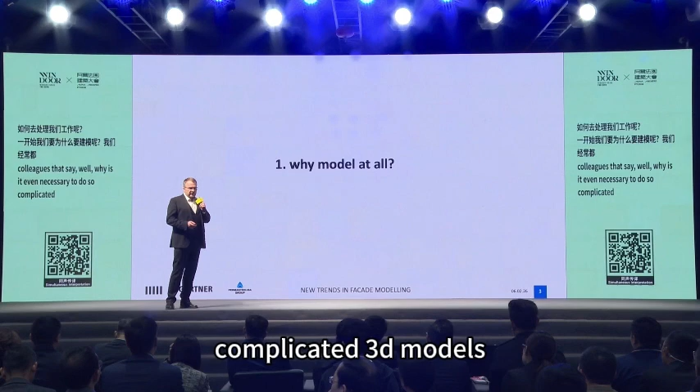In the beginning, why do we model at all? We always have colleagues that say, well, why is it even necessary to do such complicated 3D models? Can't we do that in 2D as well? There are still some of them around, but of course, obviously, with the crazy shapes. I also very much appreciate the previous presentation. We have seen how the digital tools are properly applied at Zaha Hadid's anyway, and the previous presentation also brought the point home how necessary it is to have proper 3D modeling technologies.

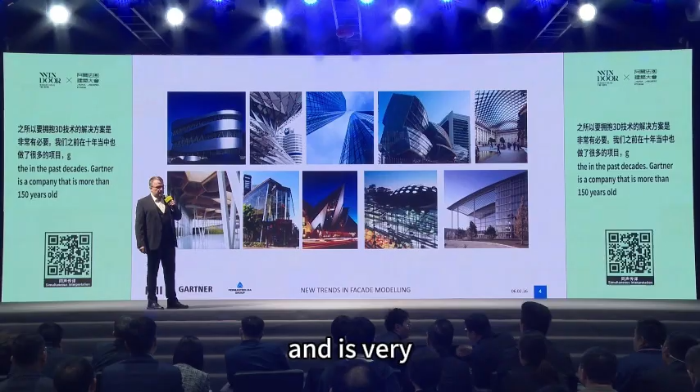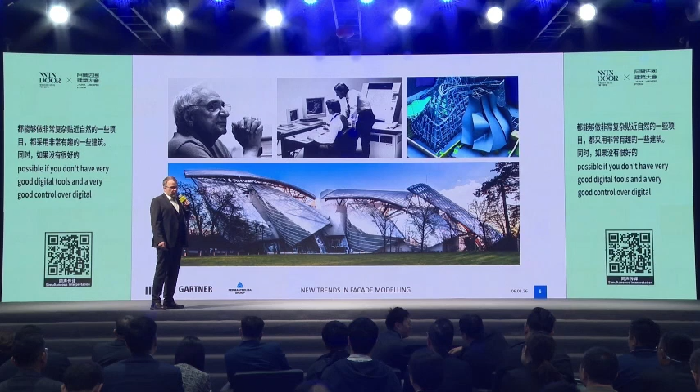Gartner, for instance, these are some Gartner projects that we did in the past decades. Gartner is a company that is more than 150 years old, and unitized curtain wall is something that they helped develop very much after the war. And later on, they went on to do these very, very complex projects together with very interesting architects. And of course, nothing is possible if you don't have very good digital tools and very good control over digital tools. If we talk about it, we talk about parametric modeling, and we will speak about CATIA a little bit.

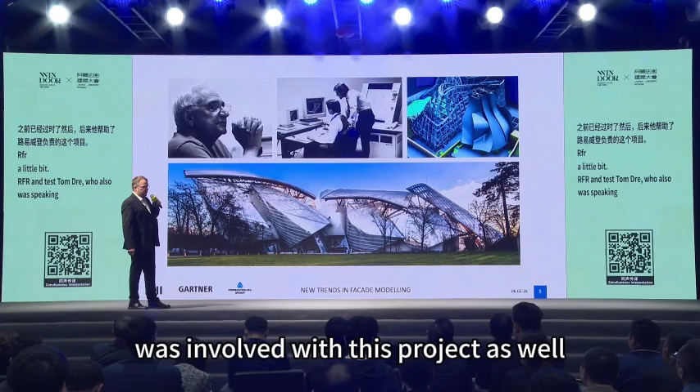Here you can see Frank Gehry, who just passed away some weeks ago, and the Fondation Louis Vuitton. That's also a project where I met Yuhui, and our history goes back to this project a little bit. RFR and Tess, Tom Gray, who also was speaking yesterday, was involved with this project as well. And for this project, they used a software that was pretty new in architecture back then, called CATIA, developed a long time ago already.

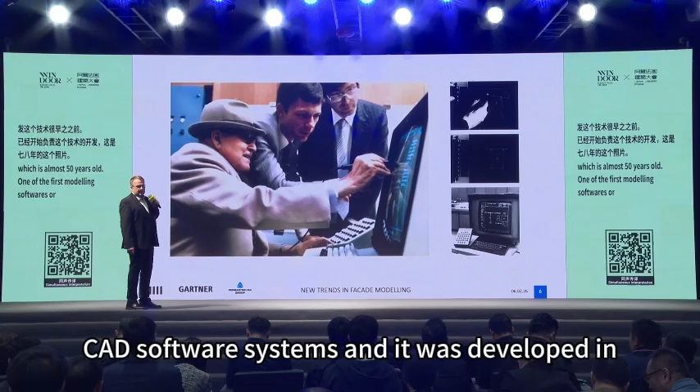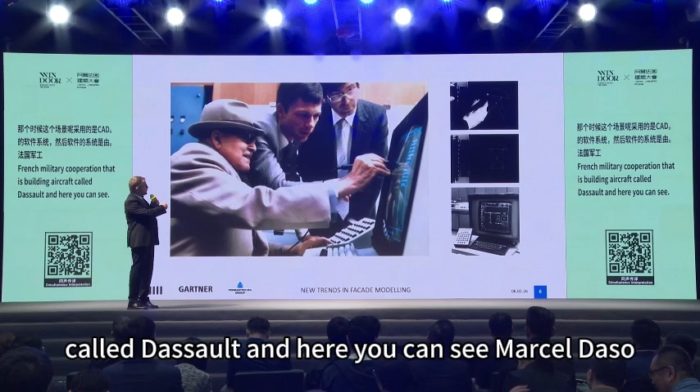Here you can see a very historic picture from 1978, almost 50 years ago. One of the first modeling softwares, or CAD software systems, and it was developed in a French military corporation building aircraft called Dassault. And here you can see Marcel Dassault, who gets a presentation of this new modeling system by the young engineers. And this system, called CATI and later CATIA, was developed into the software that was later used by Frank Gehry for the Disney Concert Hall, for instance, and for many projects later.

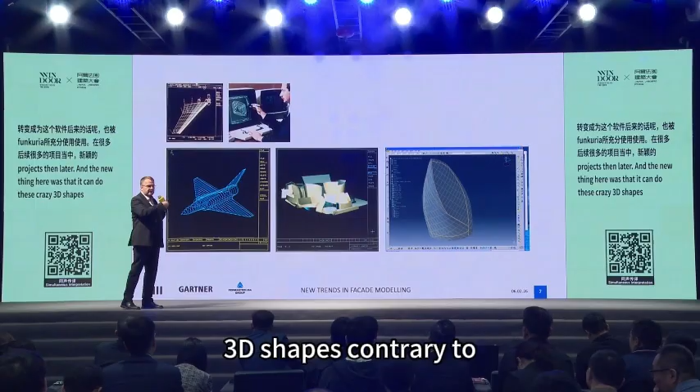And the new thing here was that it can do these crazy 3D shapes, contrary to just lines and straight surfaces, what you can see in AutoCAD and so on. And, yeah, maybe one more thing to say. At the core, these software systems are parametric.

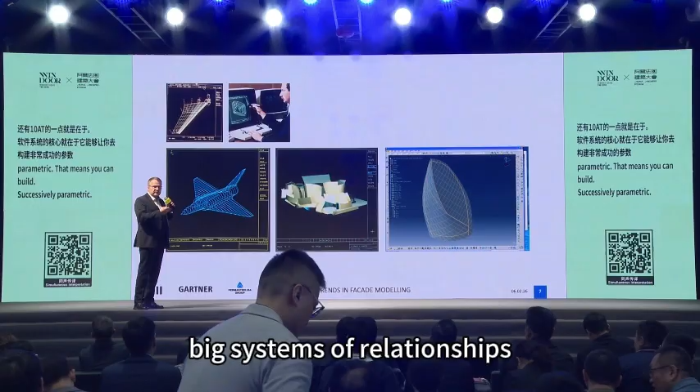That means you can build successively parametric big systems of relationships. So if you move one point on the left side, then the whole facade may be changing in the model, and all the parts, if it's done well, will also adapt automatically all the way down, which is the foundational idea of parametric modeling. And this is very, very powerful and also quite complex to operate.

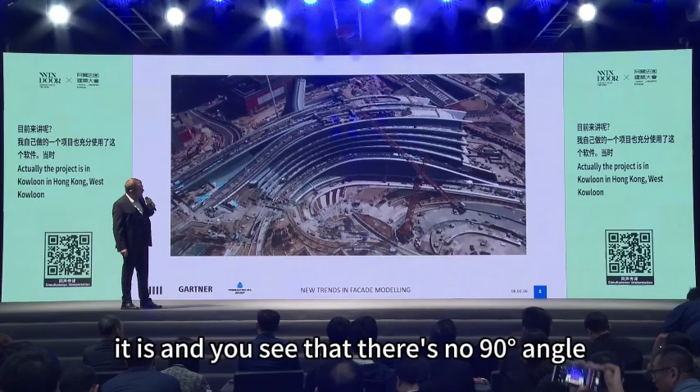But we do that anyway, and here we can see a project that I have been involved in myself in Gartner, in Shanghai actually. The project is in Kowloon in Hong Kong, the West Kowloon High-Speed Rail Terminal. And you see that there's no 90-degree angle. And there are many little stories here.

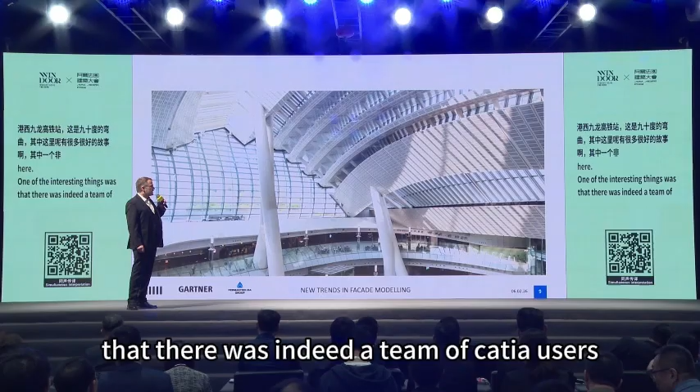One of the interesting things was that there was indeed a team of CATIA users, 3 people, and the management was thinking that these 3 people can take care of it because parametric modeling is very powerful. But of course, it was not like this. We used a similar software, we used Inventor later, and we had a team of 30 people who do the 3D modeling, and then we had a team of 60 people on top of that turning the 3D models back into 2D drawings for the project because the contract was written like this.

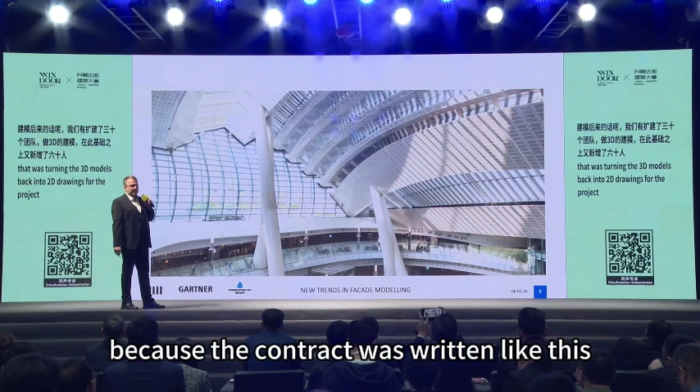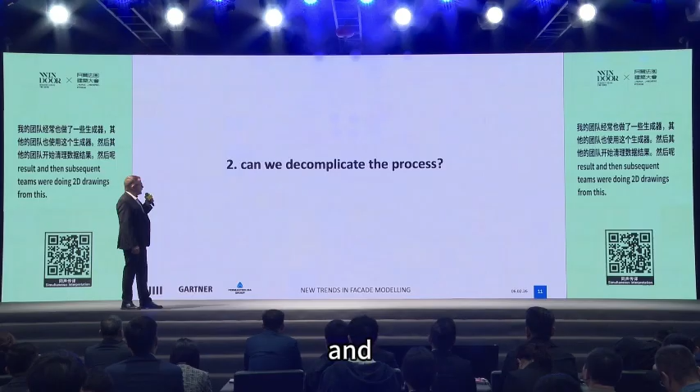Yeah, okay. So things get out of hand quickly, and you may think you have a great software system, but you still need people to operate it, and the work is actually quite significant. One more picture from this. My team was always making these generators, then the other team was applying the generators, the next team was cleaning the result, and then the subsequent teams were doing 2D drawings from this. All right, it is this complicated, and we need this many people. So is there a way to do this in a simpler way?

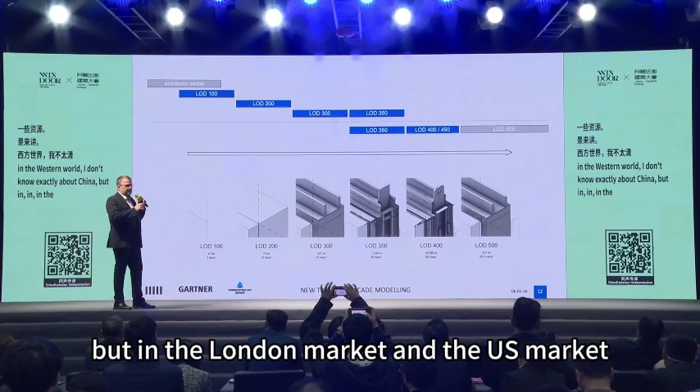And the one thing that we witness in our office in the past years is that with much more lightweight software that is per se not parametric, we can achieve almost the same or even better results than with these complicated old parametric modeling systems. At the end of the day, especially in the Western world, I don't know exactly about China, but in the London market, in the US market, we see that very much.

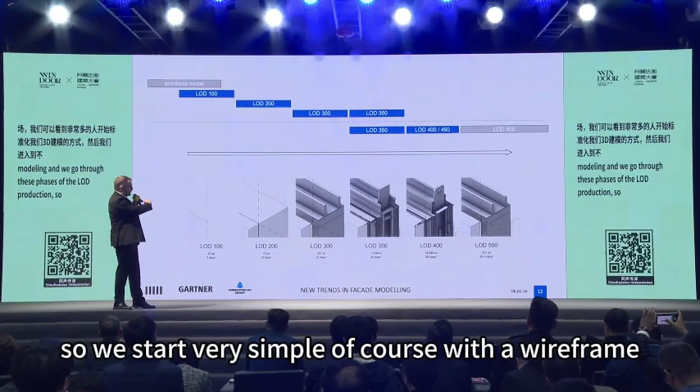People try to standardize the way we do the 3D modeling, and we go through these phases of the LOD production. So we start very simple, of course, with a wireframe, which is very important and takes a lot of time to get right. The LOD 100 and LOD 200 use up quite a significant amount of time to get it really right before you start everything else, because the whole downstream process depends on it so much.

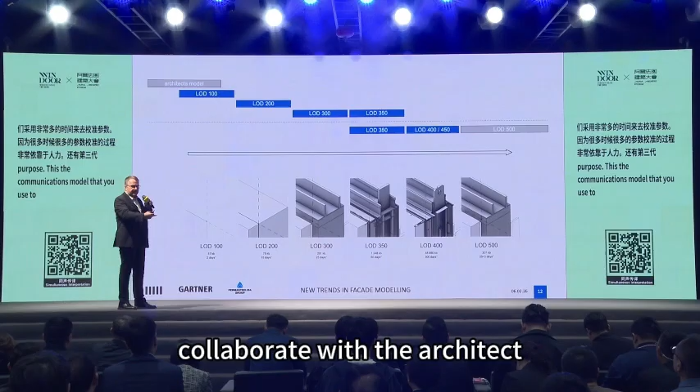Anyway, the LOD 300 has one purpose. It is the communications model that you use to collaborate with the architect and all the other entities in the process that want to understand what's going on and want to tune their design and so on. But for us, as the production company, it's not very important to have this model, but we have to have it anyway in order to communicate with the architect.

The model that we are really interested in is, I have a laser actually. Yeah, maybe I can see.

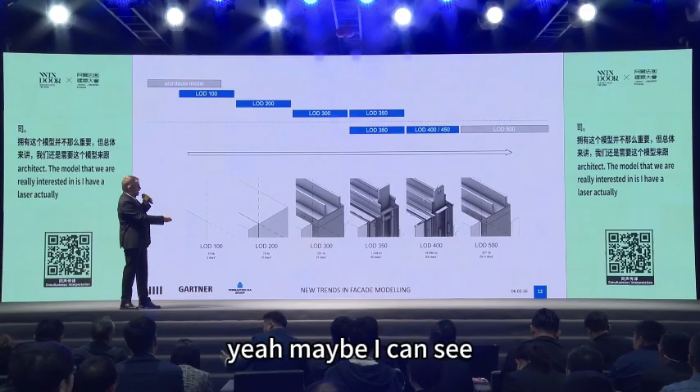The model that we are really interested in is the LOD 400 because we need it for the production. That means we will send a LOD 400 model pretty much directly to the machines, and the CNC machines take care of the rest. Of course, there are people involved and it's more complicated than this, but our model is the LOD 400, which we do with CATIA or now with Rhino and new platforms.

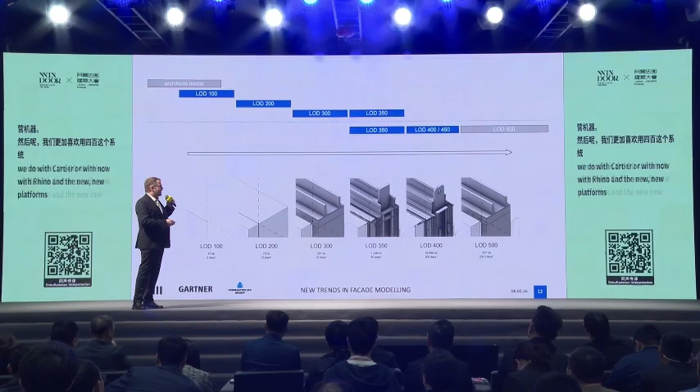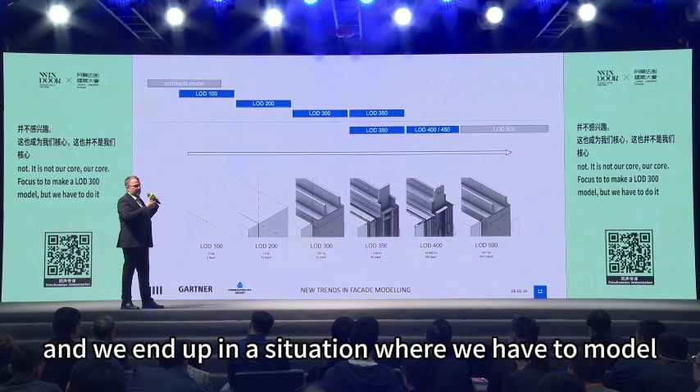And then we always have the problem, how do we actually do the LOD 300 model for the architect? It's a very painful thing for us because they expect Revit software, and we're just not interested in this. It is not our core focus to make a LOD 300 model, but we have to do it anyway, and we end up in a situation where we have to model the same building twice, once for the architect so that they can be happy looking at it, and once for our factory who really needs it.

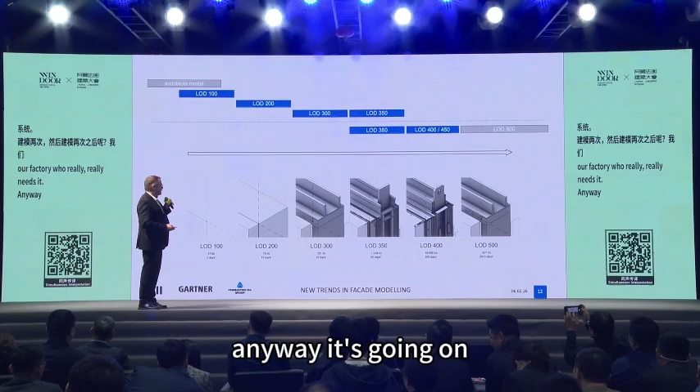Anyway, it's going on. What we have to do is find a balance between complicated and simple. Like for the system designers and for the extrusion companies, we use the sections on the very left there. Oops, wrong button.

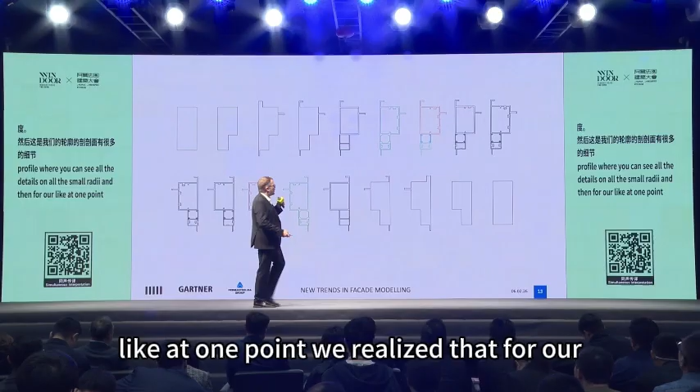On the very right, we use this very complex cross section of our, let's say, profile, where you can see all the details on the small radii. And then at one point we realized that for our production we don't need it this complicated. This one, no way, come on. So this thing here is enough for our production, and the amount of data that goes into these two sections is one order of magnitude smaller. That means the green one there is only 1/10 of the content of the one on the right.

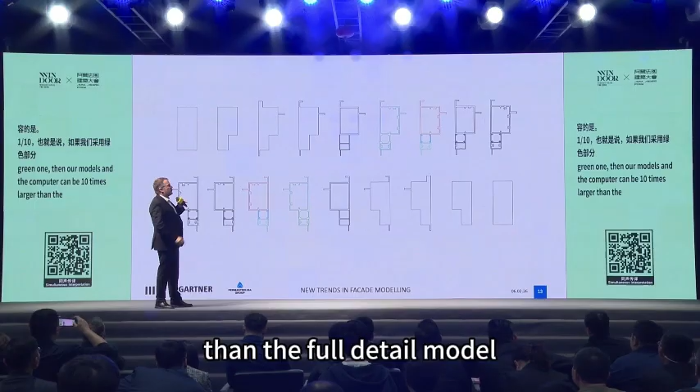That also means that if we model with the green one, then our models in the computer can be 10 times larger than the full detail model that we don't even need for the production. And then again, for the architect, it's completely perfect to work with this level here. So the middle, the second black one there, is again one order of magnitude smaller. So this is a very big difference.

And one thing I can also say for the BIM modeling, we cannot just give the architect our production model, because in Revit it's impossible to open, and they cannot handle it at all. We have to split down our models into distinct parts. So yeah, the question is to find the right balance. What is just the right amount of information, not too much, not too little, for all our processes, for the architect, for the client, and for the production. So everybody needs a specific level of detail.

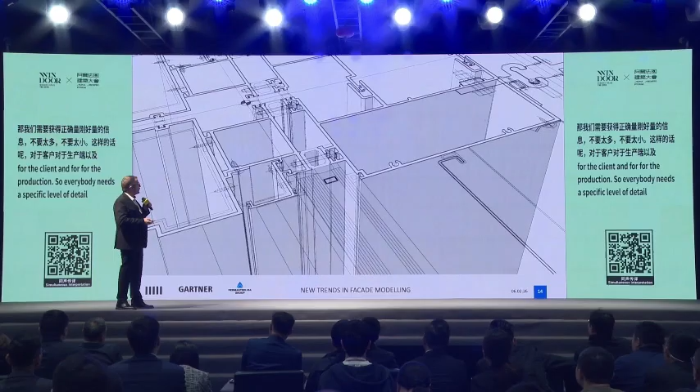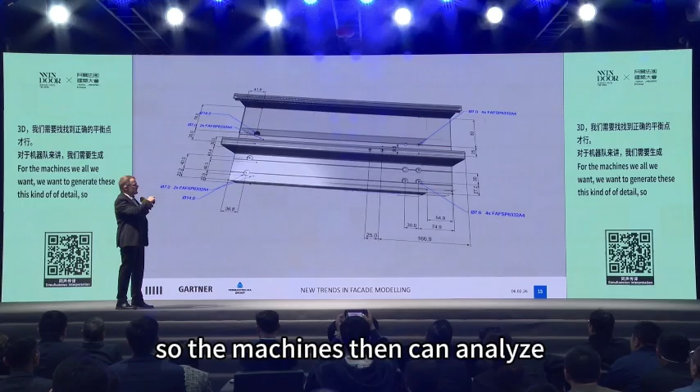Okay, and at the core, it's actually not really complicated. We take 2D drawings and we extrude them into 3D, and then we want to hit the right balance. For the machines, we want to generate this kind of detail, so the machines then can analyze automatically all these little machinings that we put in the 3D model, and they will choose the correct tools to do the cuts and to do all the notches and everything that's necessary. And then everything has to come together somehow in the 3D model to replicate the realistic shape at each part. Good. And then from there, it can get more complicated.

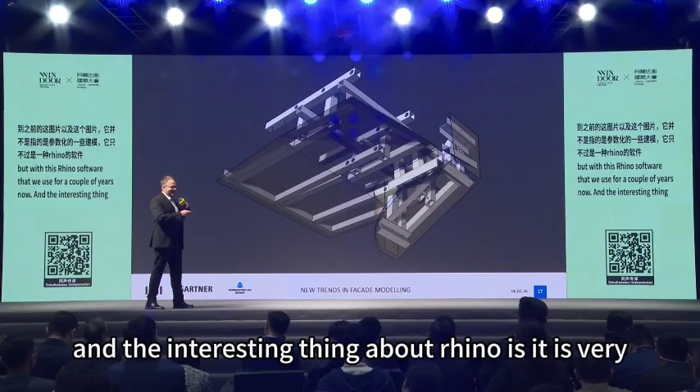My point in this part of the presentation is all the pictures that you have seen, like the previous picture and this picture, are not made with any parametric modeling software. It's not done with CATIA, not done with Inventor, but with this Rhino software that we use for a couple of years now. And the interesting thing about Rhino is it is very, very small and very, very lightweight compared to the traditional software. And it looks a little bit stupid sometimes, but it's a misunderstanding. It is just very simple software that is super capable, and it can be automated very well.

So it is not capable of any parametric modeling, but because we can automate it, and it has a powerful automation interface with it, we can get more out of it than we ever could do with CATIA or with Inventor. And this is the new thing, and also the core of my presentation pretty much, how we experience this shift away from parametric modeling to arrive at, you could say, a better stage of parametric modeling. So it all comes back, of course, to parametric modeling. We just don't use the traditional parametric modeling software anymore. We have a more powerful system that by itself cannot even do parametric modeling. I don't know whether that makes sense, but let me keep going. Maybe everything becomes more clear.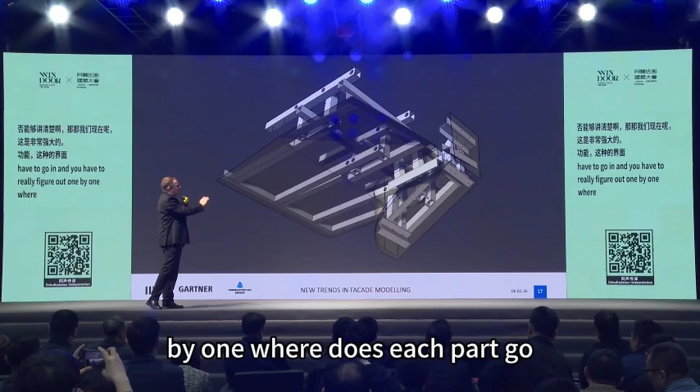So what we see here now is very bespoke. You cannot do that with parametric modeling at all. You have to go in and you have to really figure out one by one where each part goes. And until now, we can only do that with our brain.

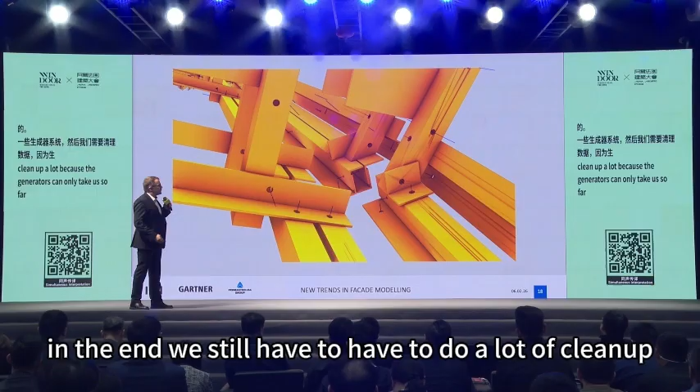Parametric modeling would not help. So here you can see also a hybrid. So some parts of this were generated with Grasshopper in this case, which is this Rhino system, not parametric, but with a generator. And then we have to go in and clean up a lot, because the generators can only take us so far. In the end, we still have to do a lot of cleanup. But we manage, and without the parametric modeling systems, we can make very complex geometries, of course.

So this is pretty much the new strategy now, that we abandon Inventor, we abandon CATIA. These are very old, very complex and very expensive softwares. The new tool and the new paradigm uses very simple software. It's very cheap, and we can automate the hell out of it. And it's also fun and easy to automate, especially with AI coming in. You don't have to program yourself anymore.

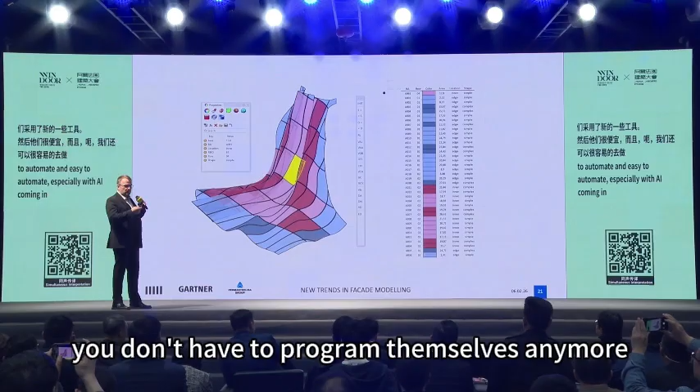So in 1 year from now or so, you will have a situation where you tell the computer the program and the tool that you need, and it will automatically program it with the new tools. So nobody needs to actually make these digital tools anymore.

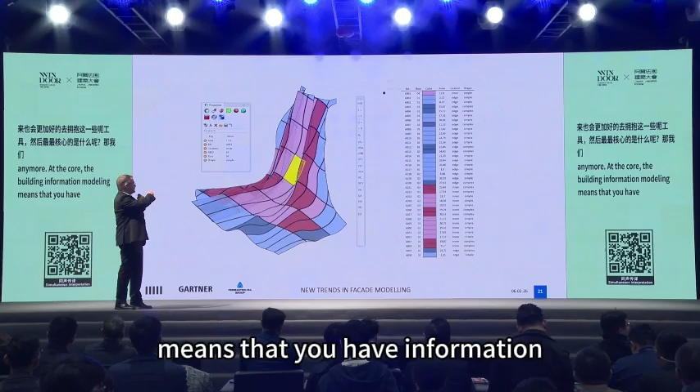At the core, building information modeling means that you have information and geometry, and you bring that all together, as you can see in this picture. So all these individual parts in 3D carry information which you can replicate to any database system like Excel, and together with all the parametric information and the geometry, you can do amazing things.

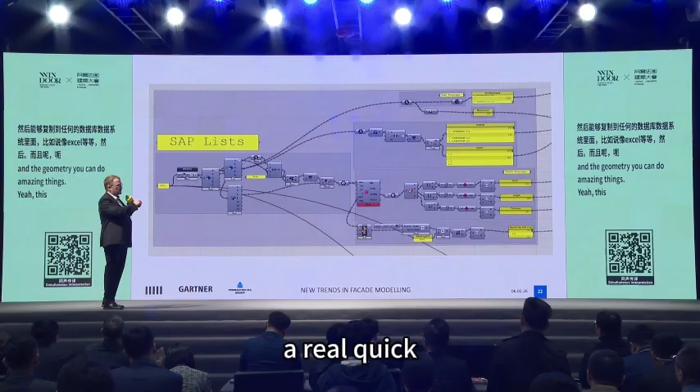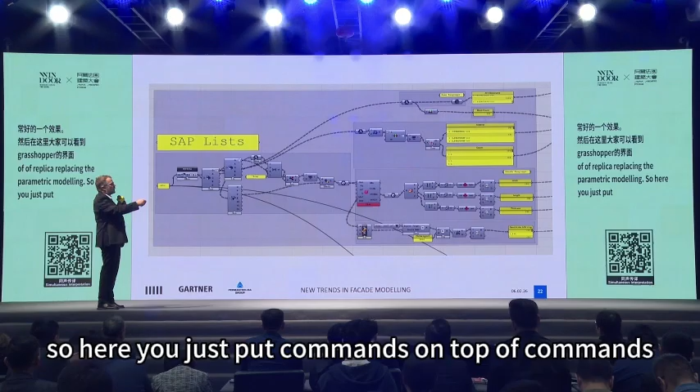This is just for you real quick how the Grasshopper interface works in Rhino. This is our new way of replacing the parametric modeling. So here you just put commands on top of commands. You start with the input, which could be a line or some very simple geometry, and then you take it apart. You take the endpoints and you divide that and copy that and offset and so on. So all these individual steps do something to the geometry, similar to what parametric modeling was doing.

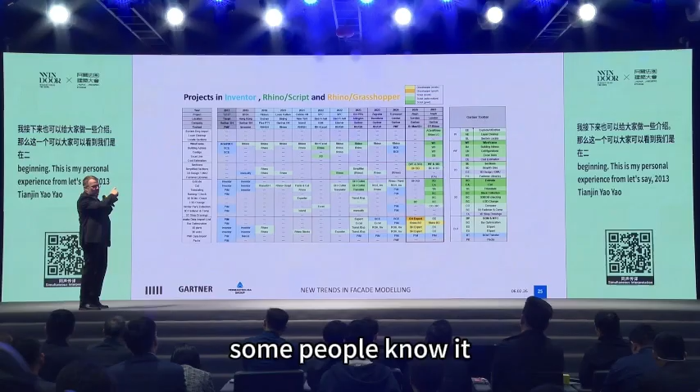Okay, and now I show you some examples of projects that we did with this new pipeline. In the beginning, this is my personal experience from 2013, Tianjin Yaoyaoqi. Some people know it, and I'm very happy to see that it is getting finished now. We started the project with my team, 19,000 unitized curtain wall panels, and we used the parametric modeling software that the company had back at the time, which is based on Inventor.

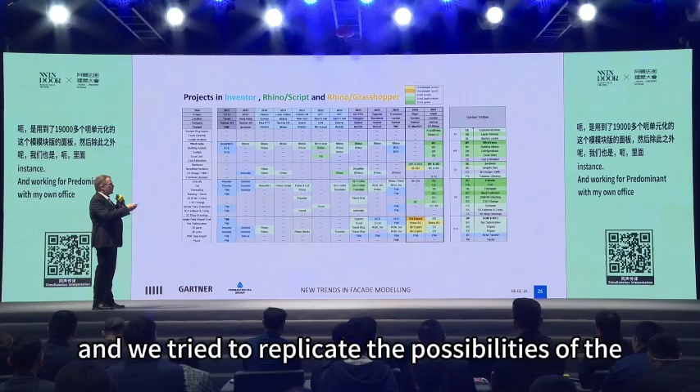And then over the years, I was in and out of Gartner, working with Rui, for instance, and working for Priedemann and with my own office. And we tried to replicate the possibilities of the parametric modeling software with Rhino, and step by step we enabled ourselves to do that. And also Rhino got better and better. Grasshopper came along. So on the right side, all the green stuff is done in Rhino. The yellow stuff is Grasshopper and generators. We see that more and more now.

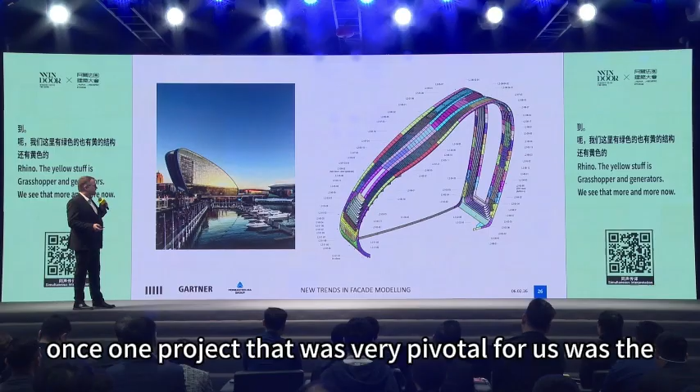One project that was very pivotal for us was the Sydney Darling Harbour Ribbon project, where we were responsible for the 2,900 aluminum cladding elements. They're all parametric as well. Nothing is 90 degrees again, so we have several Grasshopper generators, and then a lot of work to clean them up. The interesting part is that we have a flat frame unitized system, and on top of the flat frame we have a twisted metal sheet geometry. So getting that right is quite a lot of effort.

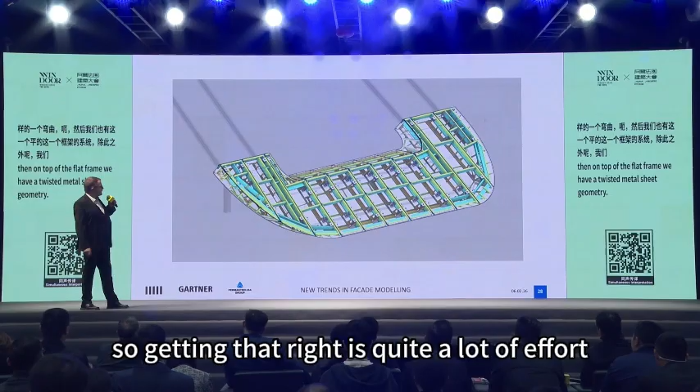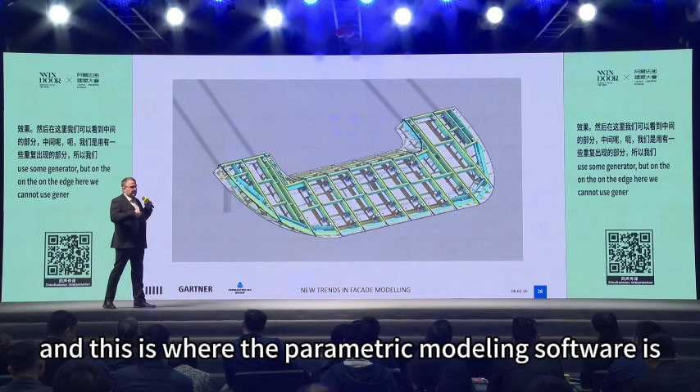And here you can see in the middle part it's quite repeating, so we can use some generator. But on the edge here, we cannot use a generator at all, and this is where parametric modeling software usually completely fails, because you would not go in and parameterize any of that. You have to develop it. You have to try 10 times to get it right once. There's a lot of back and forth between the engineers, the facade designers and the 3D modeling team.

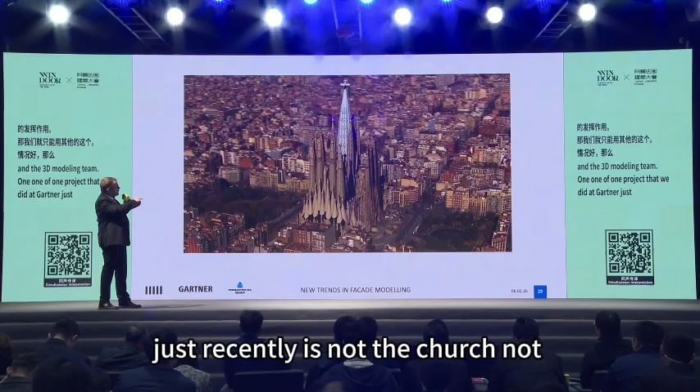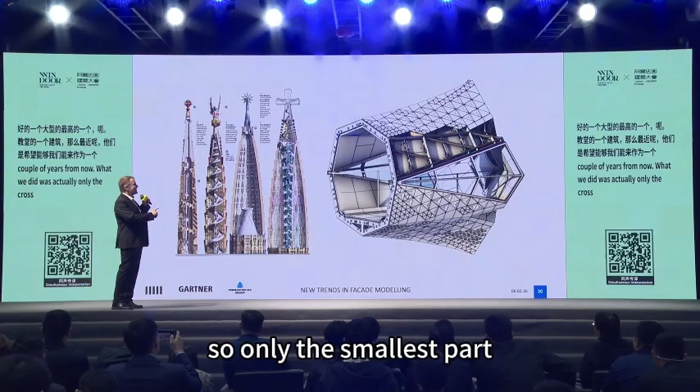One project that we did at Gartner just recently is not the church, not the Sagrada Familia in Barcelona. If you ever went to Europe, then you may have seen it. It's from Antoni Gaudi in Barcelona. Very impressive, highest church project in Europe, and only recently they push for finalization of the project in a couple of years from now. What we did was actually only the cross on top of it, so only the smallest part on the highest tower.

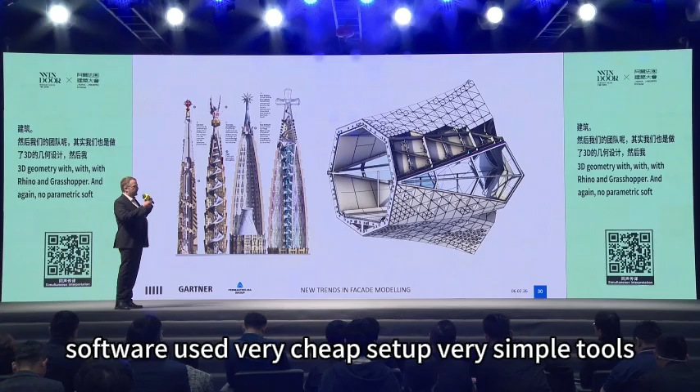So you can walk inside, and it's a high performance concrete structure covered with some tiles and all made of stainless steel with reinforcement bars and so on. And our team did the 3D geometry with Rhino and Grasshopper, and again, no parametric software used. Very cheap setup, very simple tools, just automated a lot. We automated it with Grasshopper and with our own tools.

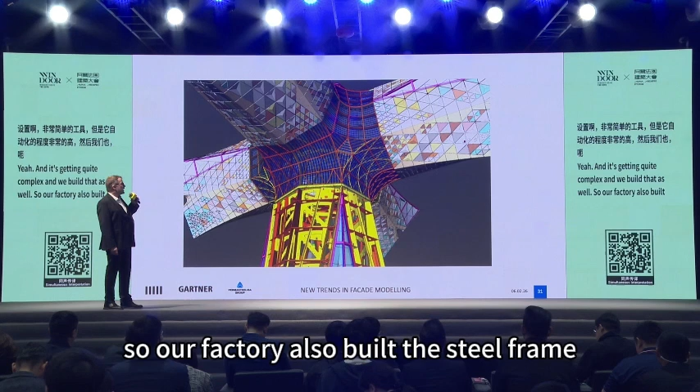Yeah, and it's getting quite complex. And we build that as well. So our factory also built the steel frame and developed all the technologies to bring it together. It's actually these 4 arms, one top arm. So we have 5 of these relatively similar structures, and the center thing, as well as the Fust, we call it the stem of the cross. So you have these, what is it, 4, 5, 6 parts, and the nucleus, the part in the center.

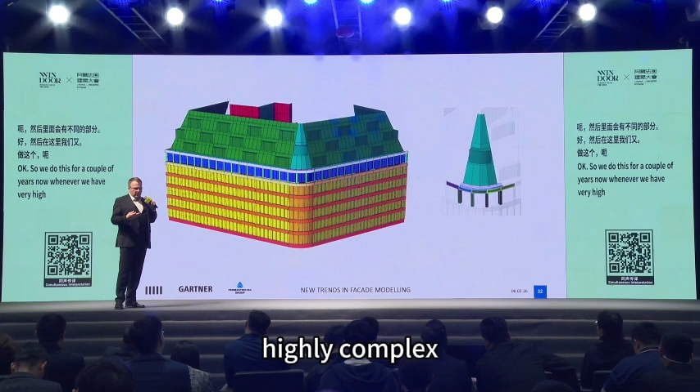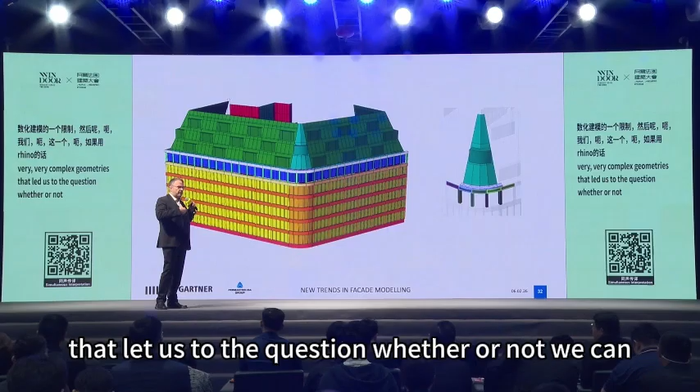And then, okay, so we do this for a couple of years now. Whenever we have very highly complex designs, same as Zaha Hadid and so on, then we have to use Rhino because there's no other way actually. So we are far beyond the limitations of the parametric modeling software. So it turned out over the last 10 years that Rhino is the right software to approach these very complex geometries. That led us to the question whether or not we can use all the things that we learned on this highly complex project on the more simple projects. And how can we do that?

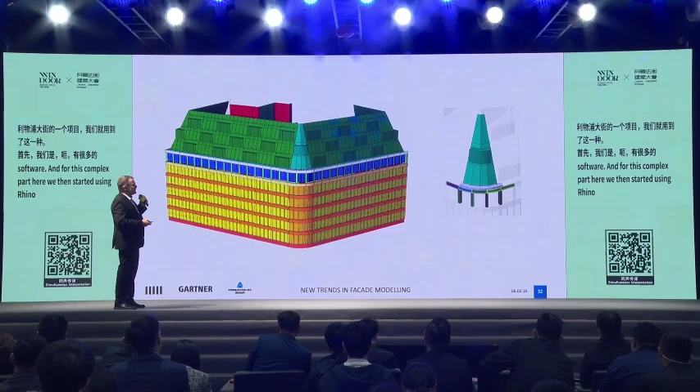So for this project here, this is number 1 Liverpool Street in London. We used it a little bit. Most of the facade was made with a traditional parametric modeling software. And for this complex part here, we then started using Rhino, and it was very helpful there. So the story is that on this facade you have these areas here where you have aluminum casts. These casts have complex geometry shape.

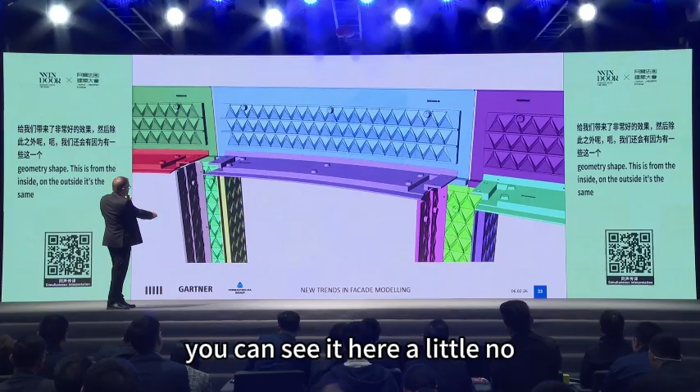This is from the inside. On the outside it's the same. You can see it here a little bit. So inside and outside have this very intricate pattern, and you cannot really do that with parametric modeling software again. It's getting too complicated, everything. And we have good teams actually. We have a very good parametric modeling team in the office, and they say it's just getting too complicated for us. I'm sorry. Do you have a better way? And then our team can actually deliver.

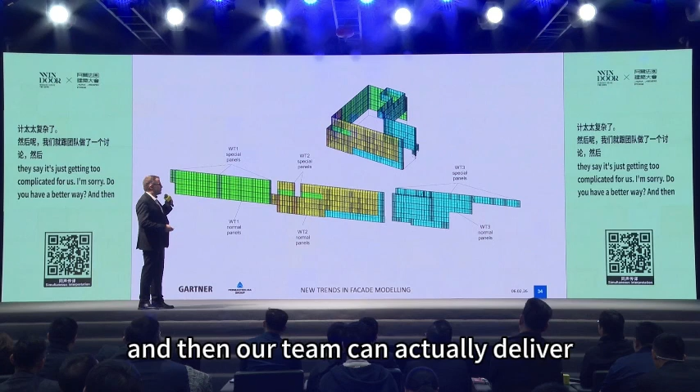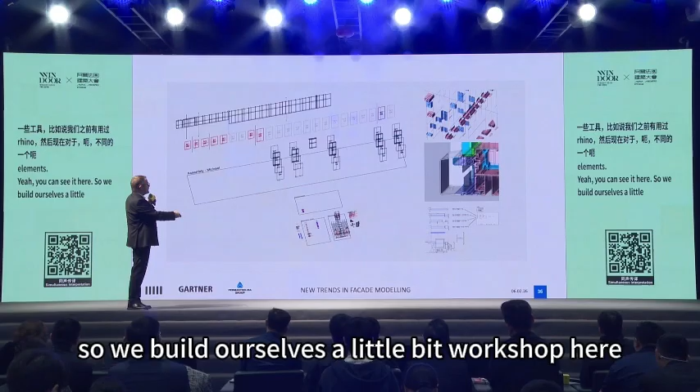And this one also a project that we did in Rhino, and it was a very simple project that we did not use any of these automation tools. We just used copy and paste like in the olden days, and pulled together different machining operations into a variation of facade elements. Yeah, you can see it here. So we built ourselves a little bit workshop here where we provide a library of different machinings and operations, and then we just put it together the way we need it in a very simplistic way. And also Rhino again is a very good software for that. And here also this is another situation where it shines, where you have these curving parts.

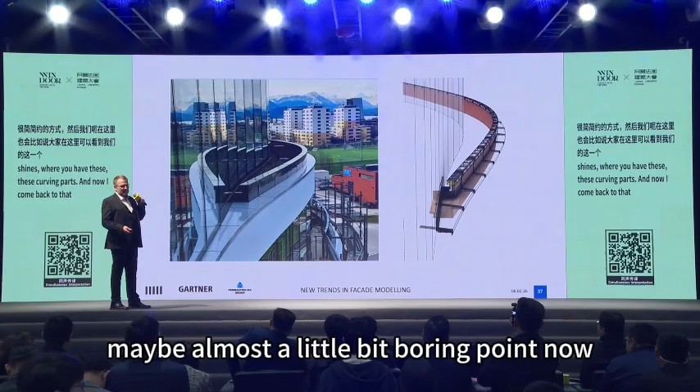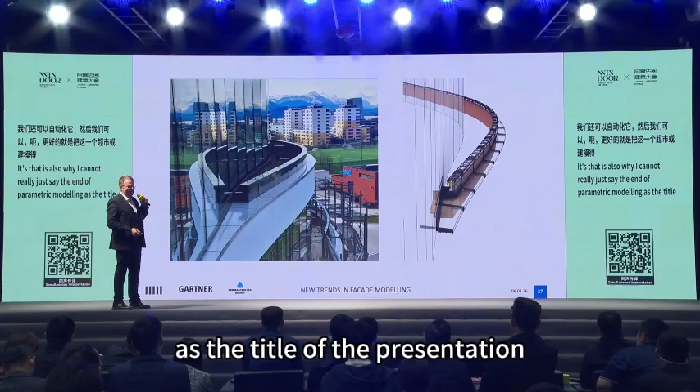And now I come back to that maybe almost a little bit boring point now. In parametric modeling, we have limitations when we use traditional parametric modeling software. Rhino is not a parametric modeling software, but because we can automate it, we can do even better parametric modeling. So that is also why I cannot really just say the end of parametric modeling as the title of the presentation, because it's actually the beginning of parametric modeling. We overcome the limitations of the original software.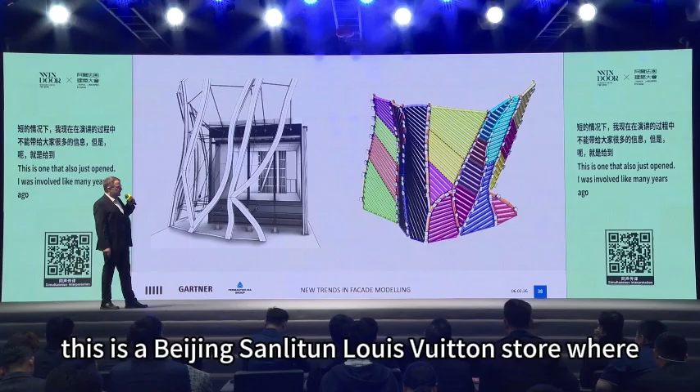This is one that also just opened. I was involved like many years ago. This is a Beijing Sanlitun Louis Vuitton store where Gartner Retail Hong Kong just finished this with Jun Aoki, architect in Sanlitun. And in the beginning it was supposed to be aluminum extrusions as the screen, and I developed the modeling system that we use there. Again, with parametric modeling software you cannot do anything, but you have to automate Rhino.

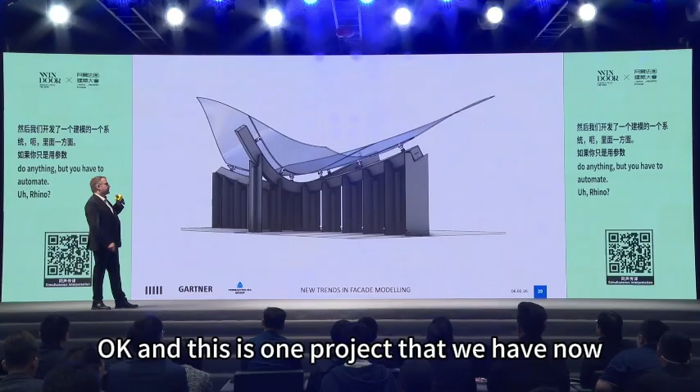Okay, and this is one project that we have now. I cannot talk about it much. We have to produce 16 kilometers of these bent steel frames, and we still look for a supplier who can help us with this, to do this in an efficient way.

We tried in our own factory, already did a mock-up of this thing, and it's really quite tough to get it all built. And it will be a very wasteful process unless we can, together with some good partner, innovate the hell out of it and find ways to do this in a much more efficient way. Yeah, glass, of course, very interesting.

So we talk about simplification of a process here. And in the office we also wonder how can we put these new possibilities into a proper framework so that we enable ourselves to have every project benefit from our findings. At the end of the day, it's very simple what we do.

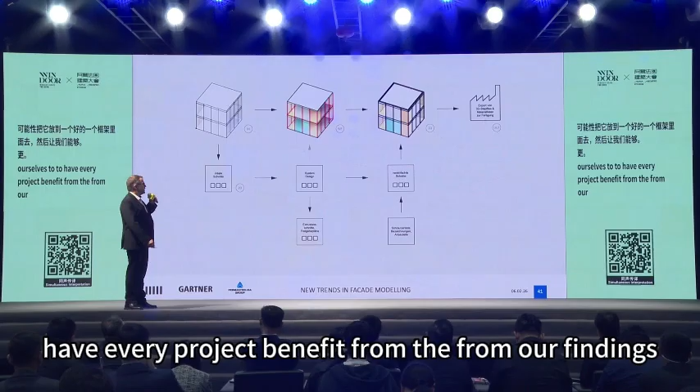We get from the architect some kind of model, and we will also derive some sections from it. We will develop a system design and develop the architect's model into a proper wireframe model. If we bring this together, we can make a 3D model from it and send it to the production.

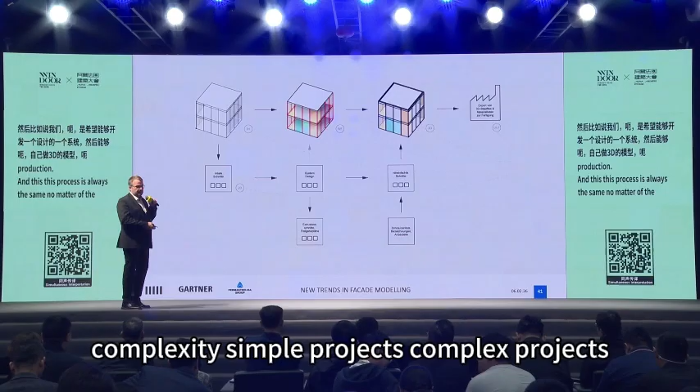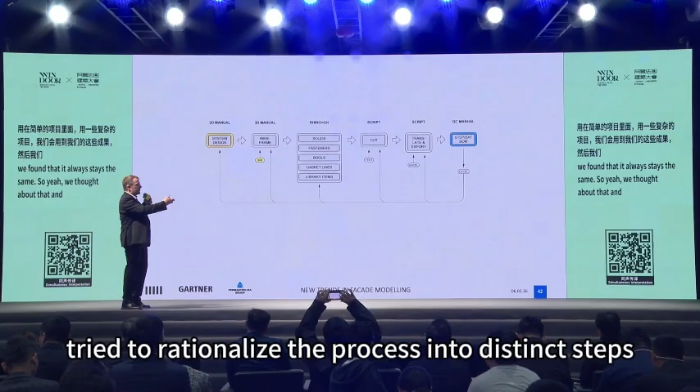And this process is always the same, no matter the complexity. Simple projects, complex projects, it always works like this. And also independent of the software, this is what we found, that it always stays the same. So we thought about that, and we tried to rationalize the process into distinct steps, and that also led us to make an experiment.

Maybe if you can start the... I cannot really do anything. Yeah, they have to hit a button.

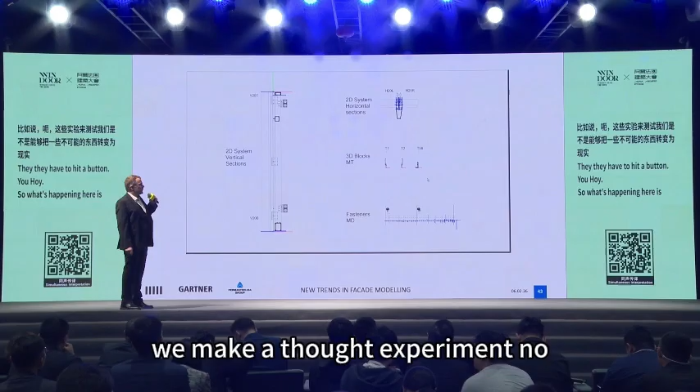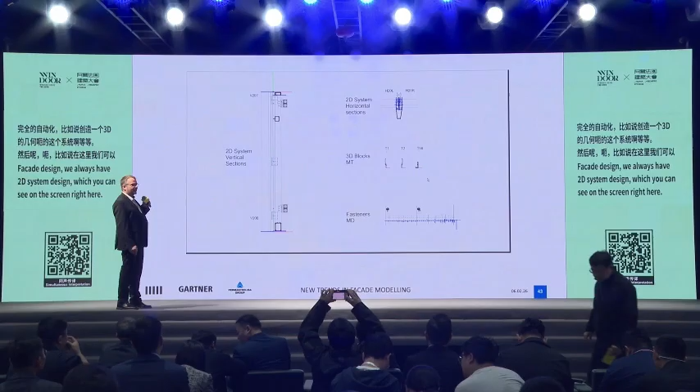So what's happening here is we made a thought experiment whether or not we will be able to come up with a system that completely automatically creates the 3D geometry just from sections. Just from sections. So in facade design, we always have 2D system design, which you can see on the screen right here. Cannot? Okay, never mind. So I explain it to you.

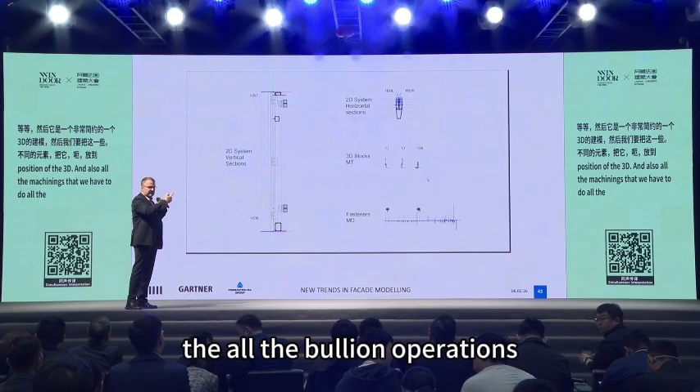We have the 2D sections. We would also give a 3D model like the wireframe, which is a very simplistic 3D model. And if we link this together in a correct way, then we can push a button and all the 2D elements can be extruded in the correct position in the 3D. And also all the machinings that we have to do, all the Boolean operations that cut away from the 3D model, we can also put into the 3D automatically from the sections.

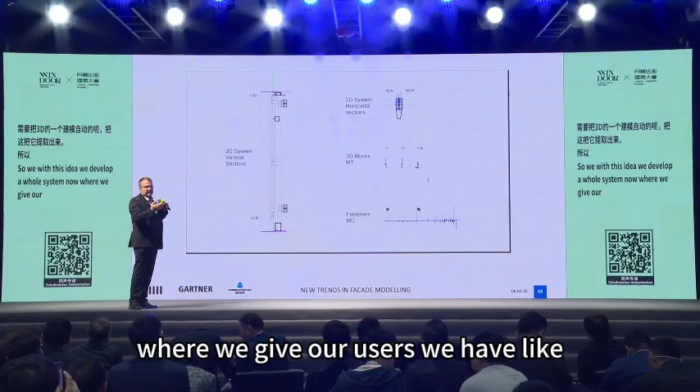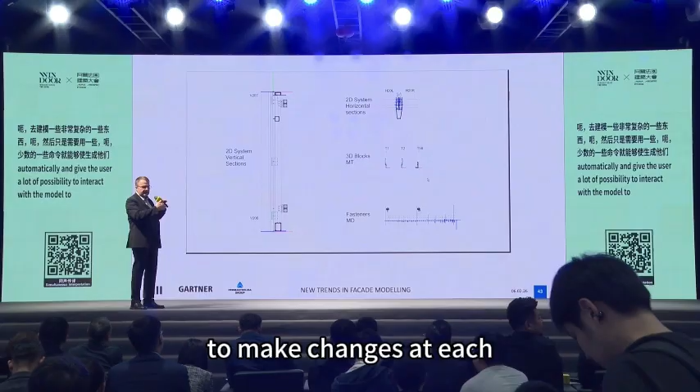And so with this idea, we developed a whole system now where we give our users, we have like 100 users right now with Rhino, a very simple tool chain that allows them to model very complex things with a very limited and very powerful number of simple commands that can build up the 3D model almost automatically and give the user a lot of possibility to interact with the model, to make changes at each particular step.

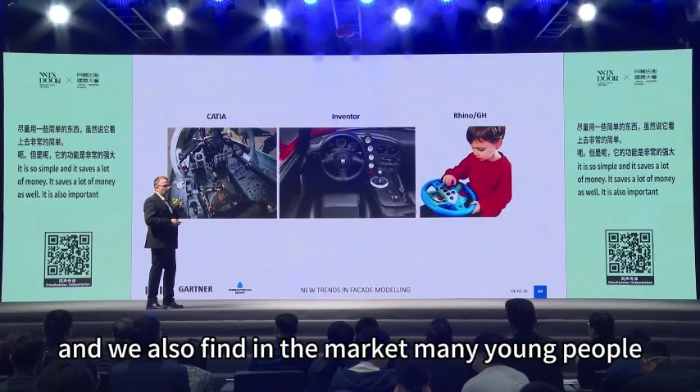Okay, and this is also pretty much the end of my presentation. We went through this process coming from CATIA and over Inventor, and now we end up with something very simple that looks like a toy, but it's very, very powerful because it is so simple. And it saves a lot of money as well. That's also important.

And we also find in the market many young people who are trained on that software already. They come out of architecture school and out of design school with these skills, and that benefits us a lot. It's very difficult to teach and train people on Inventor and CATIA. It's very expensive. I repeat myself.

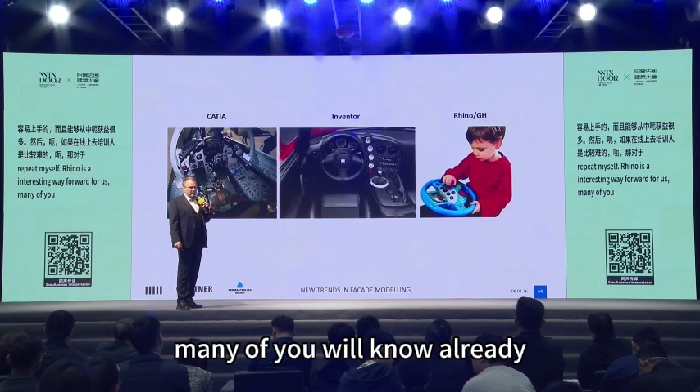Rhino is an interesting way forward for us. Many of you will know already, but I can confirm that here a real change in the industry is happening. And that was my presentation.